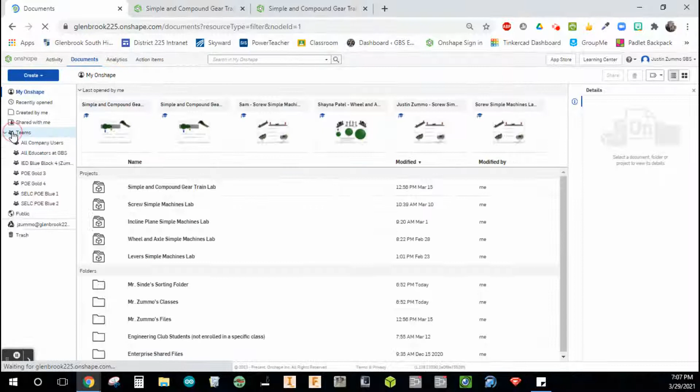The first step, as always, is to sign in to the Glenbrook Enterprise. Once you've done that, flip over to the Documents tab, locate your team folder for your class, and find the new project folder titled Simple and Compound Gear Train Lab. Open that up. Select the file, right-click, go to Copy Workspace, remove 'Copy' at the end of that title, and add your first and last name at the beginning.

As that's taking a moment to populate, I wanted to flip over to the second tab I have open here and show you the completed version of this lab.

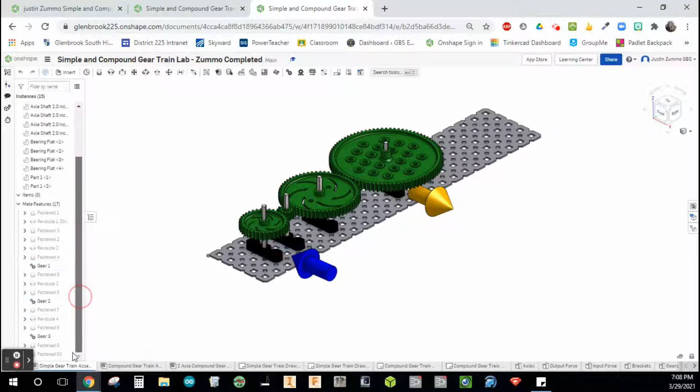So this is what we're going for with the simple gear train. We're going to have 4 different axle shafts. Each gear is on its own shaft, and you're going to link up the 36 tooth to the 12, from the 12 to the 60, and then from the 60 tooth to the 84 tooth. We'll do some gear analysis relations, so there are specific values that we'll type in to make it all animate and look nice.

When it's all said and done, you'll be able to animate the revolute constraint. I'll set this to loop. If I hit play, you can see each one of those gears individually rotating, and the gear relation values we type in specifically allow this animation to look as good as it is. They all rotate at the same speed, or the appropriate speed, I should say. So that's just a quick look at the simple gear train.

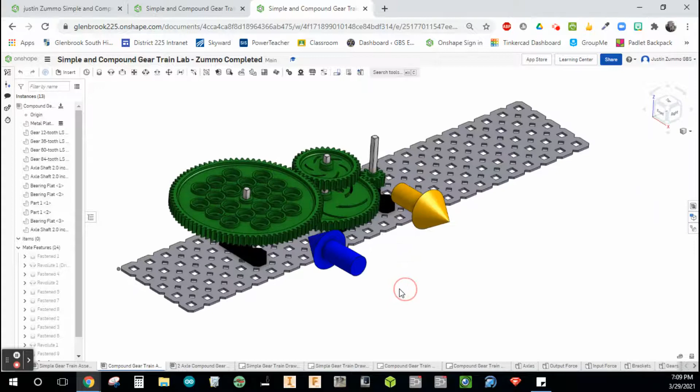The compound gear train will have 3 axle shafts. Starting on the first axle shaft, we're going to hook up the 84 tooth gear to the 36 tooth gear. That one will then share a shaft with the 60 tooth gear right underneath there, and then we'll make a connection from the 60 tooth to the 12 tooth gear to round it out.

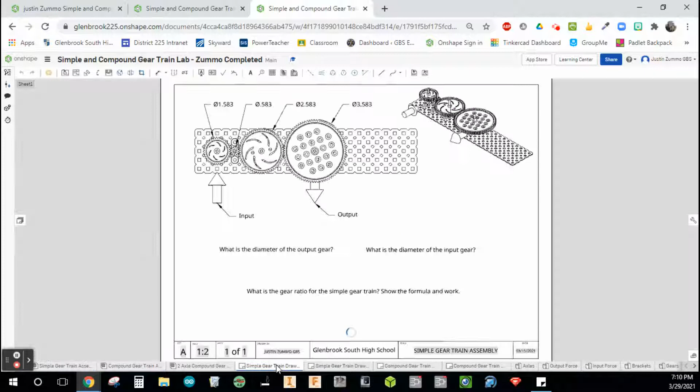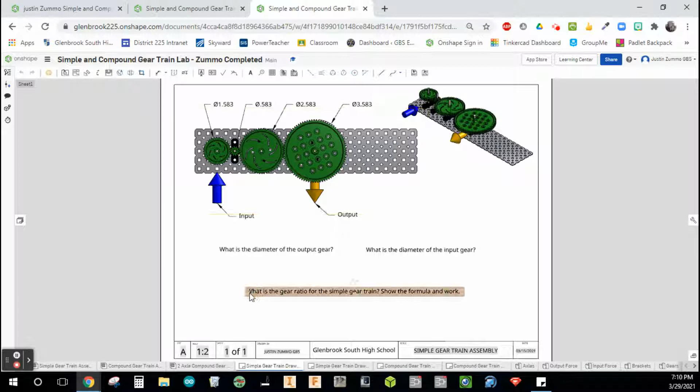There are 2 drawing sheets for this activity. The first one is for the simple gear train. I dimensioned the diameter for each one of these gears. So using the diameter, tell me what's the diameter for the output gear, what's the diameter for the input gear, and then using those diameters, what is the gear ratio for the simple gear train? Make sure you show the formula and all your work using the note feature right here.

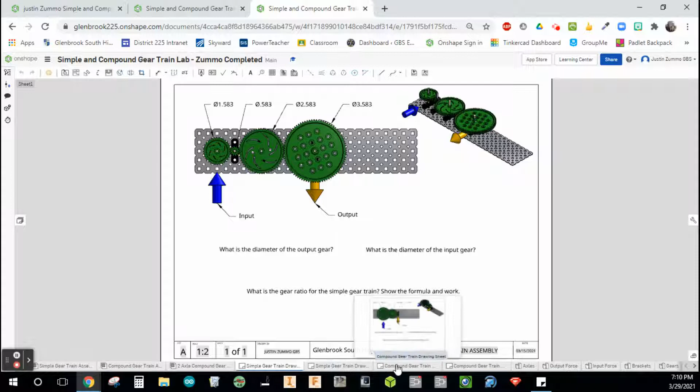On the second drawing sheet, you'll see the compound gear train. This time around, I decided to give you the information relating to the number of teeth. So using the number of teeth, tell me what does the final output gear have in terms of teeth? What does the initial input gear have? But make sure that you take into account that this is a compound gear train, and we can't just go from first to last with this. So you will have to set up the formula and calculate what is the gear ratio for that compound gear train.

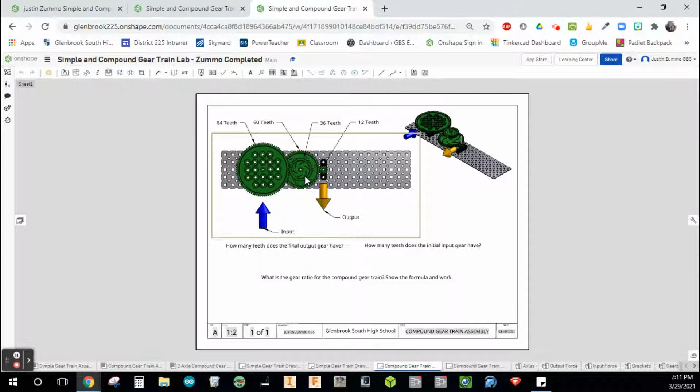As a reminder, you still do your out over in for the gears that are meshed together. And then when you have them on a single shaft, you want to multiply those 2 ratios together to get a total ratio for the entire gear train in itself.

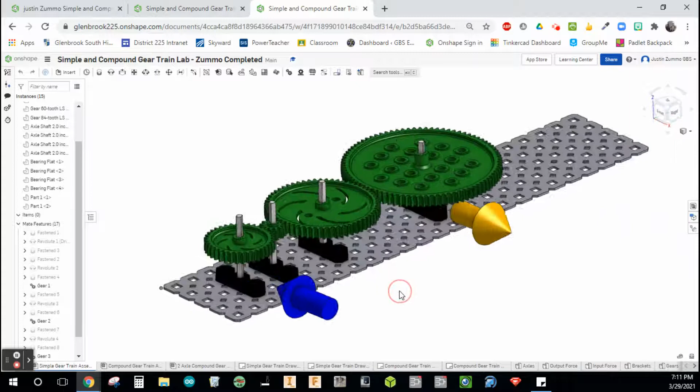So I'm going to leave this tab open in case I need to come back and reference any of these dimensions. Pretty straightforward though. We're just going to set one of the bearing flats in there, and based on the spacing here, set up our gears on the axle shafts and then get them to rotate nicely together. Just going to be a little bit of offsetting with the heights for the gears so that they're in line with each other.

And that's pretty much it. So let's go ahead and get started. Flip back over to this tab. Okay, and it loaded me onto the axles tab, but you guys should know at this point now, go ahead and move all the way down to the left and find the simple gear train assembly file.

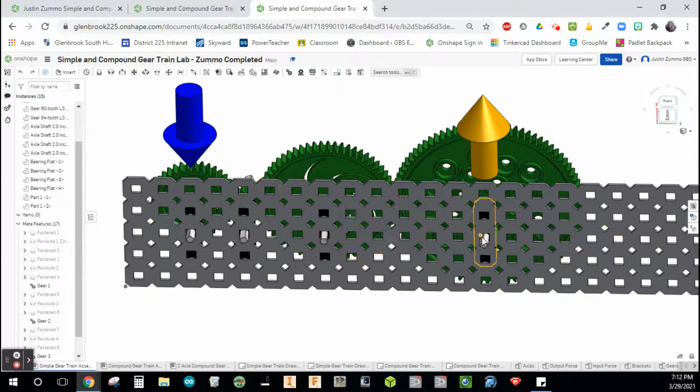And I'll go ahead and set my bearing flats in place first. Going back and forth here between my completed version and the one that I'm demoing for you, I'm going to skip 2 holes and put my first one, skip another hole and put my second one, skip 2 more, put the third, and then skip 5 and put the fourth. So let's go ahead and do that.

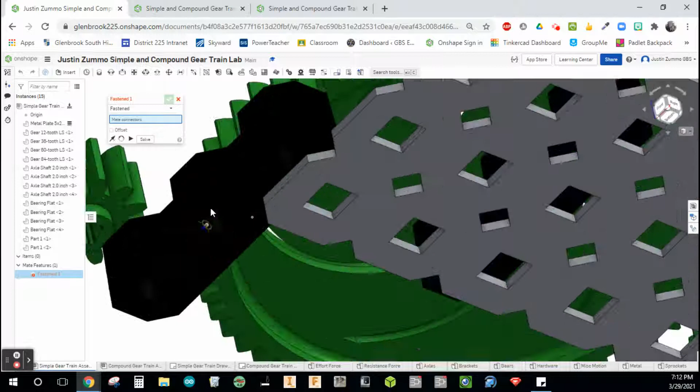I'm going to grab my fastened mate constraint, rotate to the bottom half of the bearing flat, get my edges to pop up, and go ahead and select the center hole. It really doesn't matter where you start here, I'm just going to start exactly where I had it on my completed version.

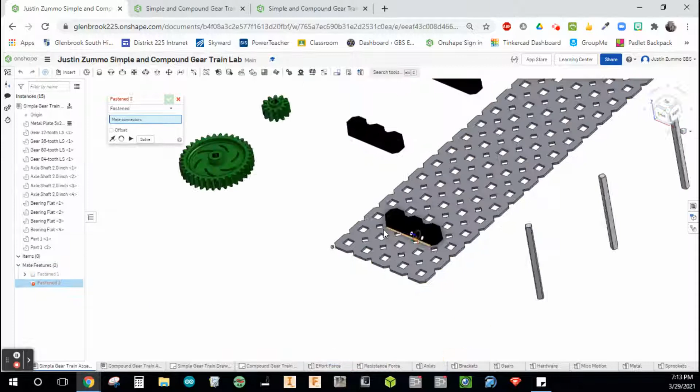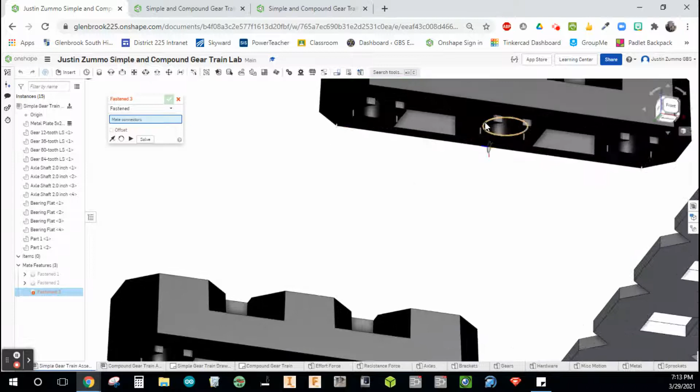So in the center of the plate, right on top of it, check mark to finish the placement. Do the next one, get the center bottom of that hole. We're going to skip one row and put it right there. We'll then skip two more and put our third one. Grab that point right underneath in the center, skip two rows, here comes our third bearing flat.

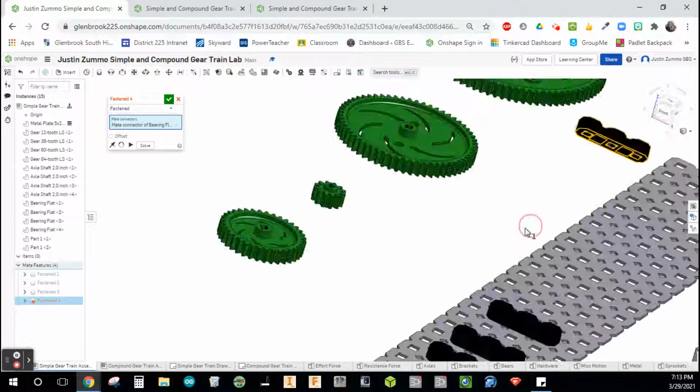And lastly, number 4, grab the center point on the bottom. We're going to skip 5 rows, 1, 2, 3, 4, 5. I'm going to put it right here on the 6th one. Double check that.

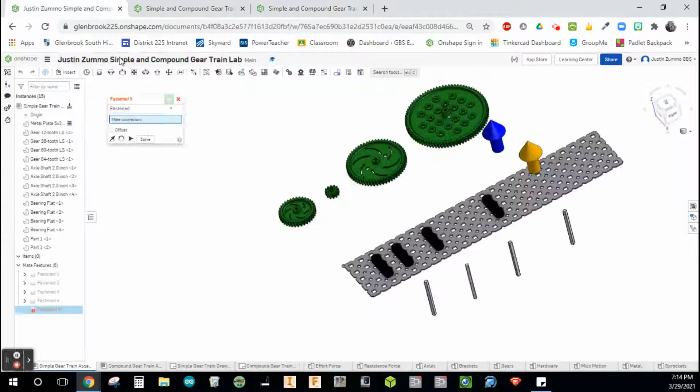Looking good. Okay, so next I can go ahead and drop my axle shaft in, and I do want this to be a revolute mate. So I'll grab the revolute mate here, rotate to the bottom, and go ahead and grab this bottom point on the center of the shaft.

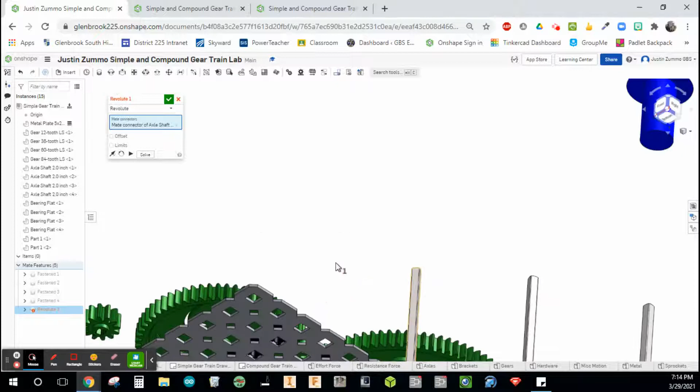And then from underneath the plate, actually, I'll just go ahead and find that hole that I have my center point lined up on, and I'm just going to grab the very bottom of that plate. No offsets required. I did have an offset on my completed version, but it's not really necessary. So go ahead and continue that process.

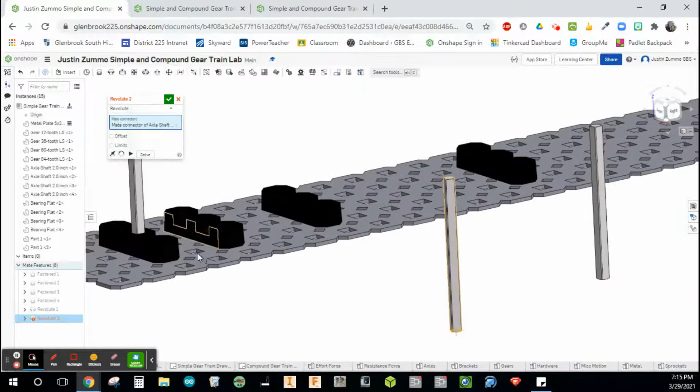Grab the center point on the bottom of the shaft, grab the center point on the bottom of the metal plate. I'll just do it backwards this time, grab the center point on the plate and then on the axle shaft.

And the last one, bottom center there, bottom center here. Okay, check mark to finish that placement. We now have revolute constraints for each one of the axle shafts.

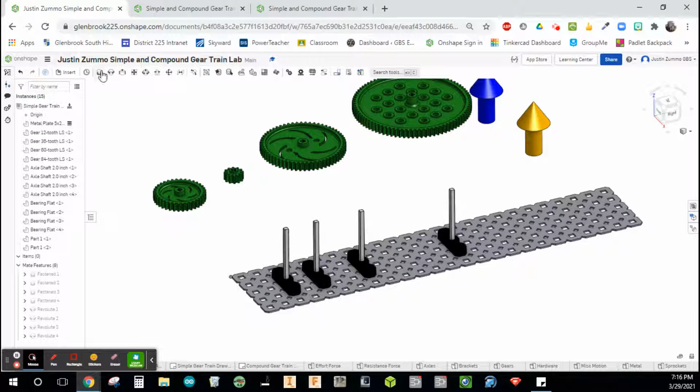And the next step will be to go ahead and seat the gears onto each one of the shafts. We'll just have to do some offsetting so that the gears are nicely in line with each other. So we'll go ahead and start us off with a fastened mate. I'm going to grab the center top right here, grab the center top there, and I'm going to offset it in the Z direction, negative 0.5.

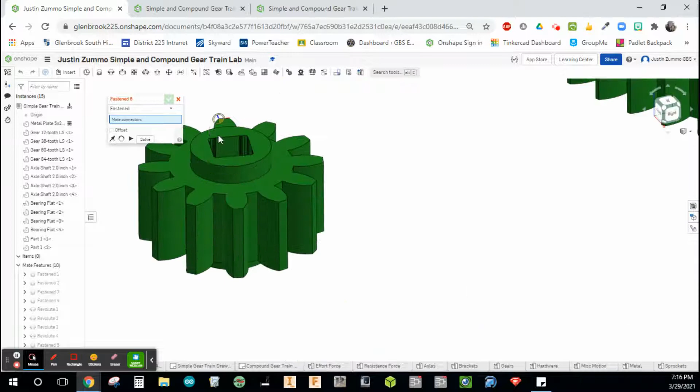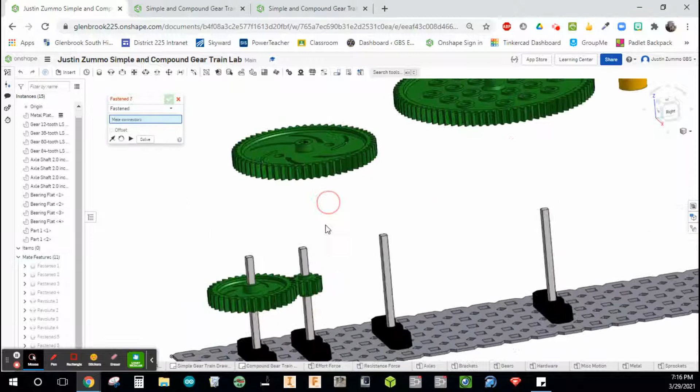Moving on to the 12-tooth gear, grab that top center point, grab that top center point, offset Z negative 0.5. That looks perfect. Check mark. Next, the 60-tooth gear, grab the center point on the gear, center point on the top of the axle shaft, do an offset in the Z direction of negative 0.5.

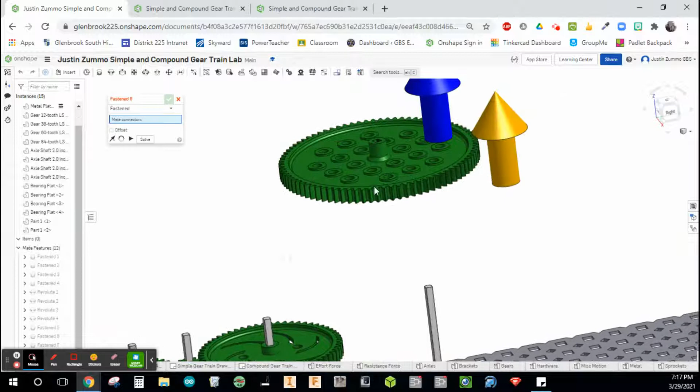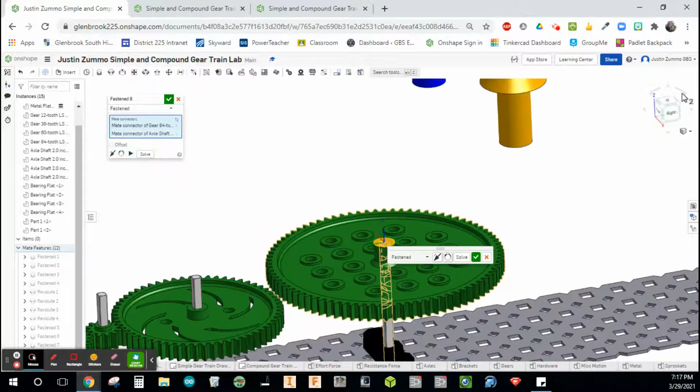Those are all perfect. And I believe the last one's going to be a little different just because of the extension that's on this gear. It's extended on one side and it's flat on the other. Either way, we'll have to do a different value for offset because these have a smaller offset around the axle shaft. So we'll go ahead and grab the top center point on this one, grab it here on the axle shaft. I'm just going to click on the right side of my view cube so I can see it from the right profile.

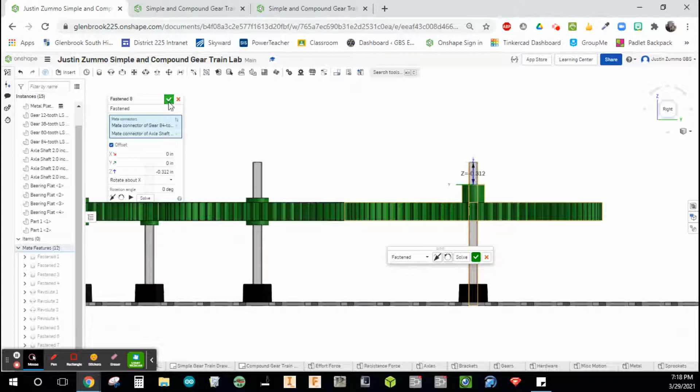That way I can play with this number for a moment. If we do negative 0.5, it ends up a little low, so we can bring that up to negative 0.3, which for all intents and purposes would be just fine. I'm going to add a little bit to that, negative 0.3125, and it looks pretty nicely in line right now. Hit the check mark to finish the placement there.

And if you notice, you click on your gears, you can actually rotate them, but they're all glitching through each other. So the next step is going to be to set up that gear relation between each one of these gears. So the first one is going to be gear relation.

And for mates, you can actually select—it might be a little easier just to grab it off the feature list here because you need to select certain mates. So I'm going to say between Revolute 1 and Revolute number 2, I want that relation ratio to be 3 because it's 36 out.

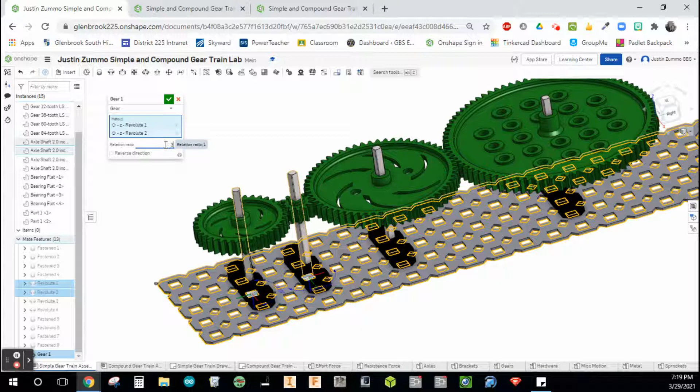I want that relation ratio to be 3, which is kind of counterintuitive to the formula that we use. We normally think about gear ratios as out over in, but for some reason when you're doing the relations here in Onshape, it's actually the inverse of that. So instead of doing 12 divided by 36 to get 3, I'm going to flip those numbers and say 36 divided by 12, which gives me the relation ratio of 3. Right? Now that should be pretty good in terms of rotation. They'll rotate in unison with each other.

So you might notice that I do have a little bit of an overlap here between the gears, and the kind of cheap and dirty way to fix that is to slightly offset the rotation for the gear and the axle shaft. So if I go to my fasten mate number 5, I can hit the drop down menu here and say rotate around the Z axis. And if I just put a really small number in, and I'm going to click inside the box here just to see how far it moves, still a little bit of glitch with 1 degree. Try like 1.5 degrees. Still a little bit of glitch. Let's see how 2 looks. A little far on the other side. So 1.75. And you can really play with that as much as you need to in order to create the outcome that you desire.

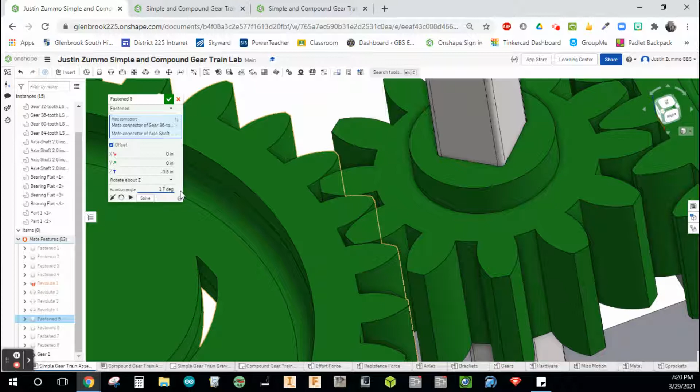It's a little bit touching there still, so me being a perfectionist at times, I want to keep playing with that number and see where I can get it to line up nicely. Is it 1.65? That looks just about right. I could have just referenced the value on my completed version because I did take the time to go through and make those changes. But here, a rotation angle of 1.65 degrees allows those teeth to kind of line up nicely.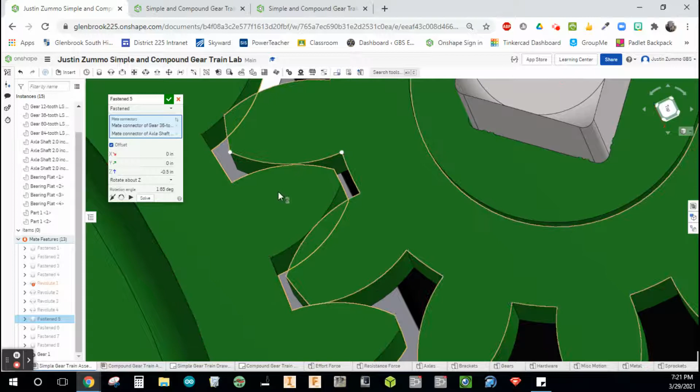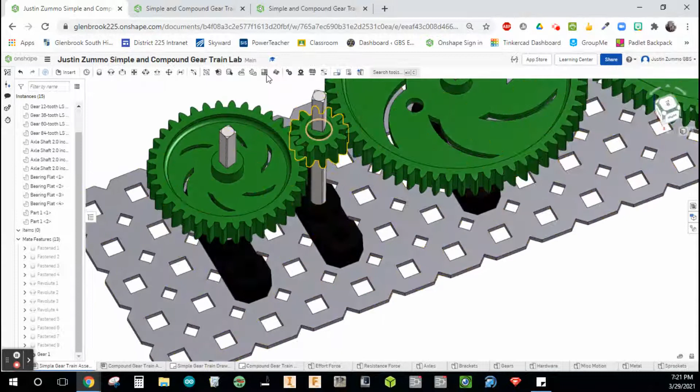I called it cheap and dirty because technically now, if you look here, we've actually rotated the shaft away from the center point, or like in alignment with the opening for the gear. So you do have a little bit of a glitch here, but it's such a small number that you're really not going to see it. And it's a fine trade-off when you see those gears meshed perfectly and rotating perfectly with each other. So that would be my suggestion for you all as you're making your progress through this lab.

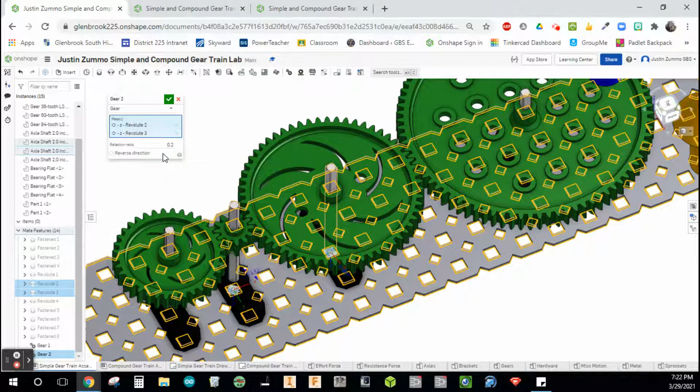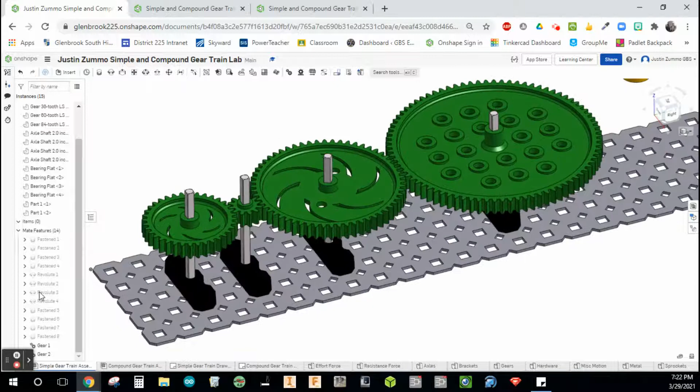Next gear relation, we're going from the 12 tooth to the 60 tooth. So I'm going to grab Revolute 2 to Revolute 3. My special number for this is 0.2. Hit the check mark to finish the gear relation. If I try to move this, getting a little glitchy just because of the lag here, but I'm going to go ahead and just animate it this way. Put it on a loop, 300 steps for 360 degrees. Play that. Always looks a lot nicer when you do it this way.

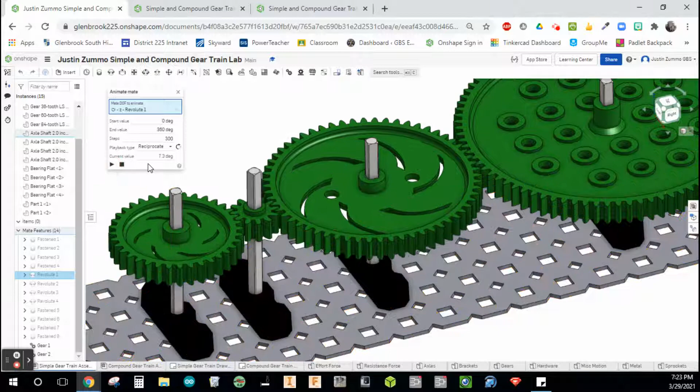So something that I'm noticing right now is my gear is actually rotating in the wrong direction. And you can change that by going to the gear relation and just checking the box there for reverse direction. So go ahead and do that now. Double click gear 2 relation, hit the reverse direction option. Go back to Revolute 1 and animate it. See how that looks. That's better. Now the gears are rotating in the proper direction. Just might want to do another little offset here on the third gear to get those teeth to line up a little better. So let's go ahead and try that.

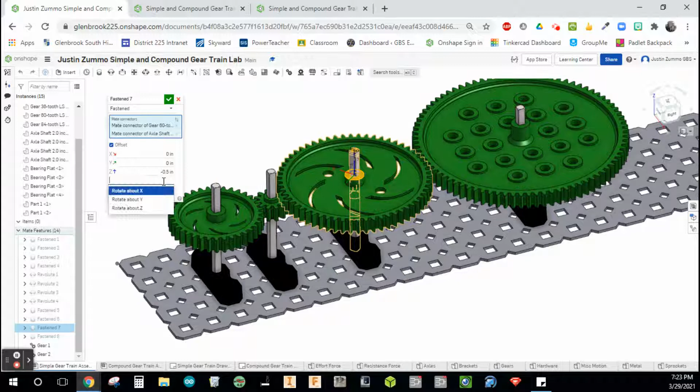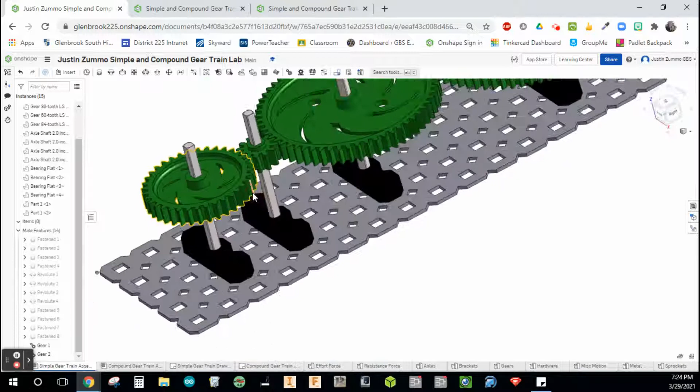Fastened mate number 7 is the one that I want to change. Rotate around the Z-axis is the direction we want to rotate in. If I just switch to the top-down view here, let's play with those numbers and see where we land. 1 degree looks perfect to me. There's a perfect amount of separation on each side there. So I'm going to go ahead and check mark that. And then run it one more time through the animate feature just to see how it all looks. Perfect. Very satisfying to see those gears turning in unison without any glitching between them. All right, we got one more to go.

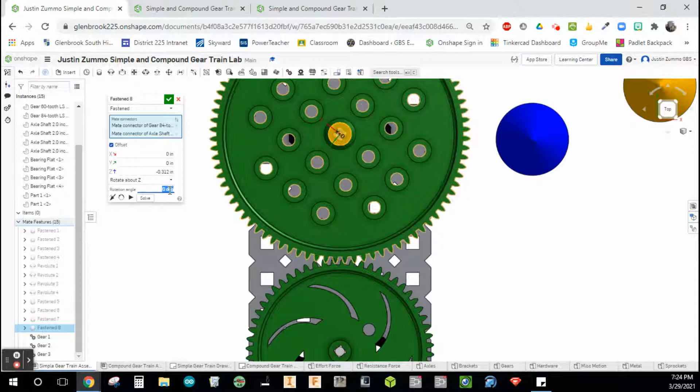Do a gear relation between Revolute 3 and Revolute 4. My special number for this one is 0.714. Check mark. And then we can do a little offset here on our last constraint to get those teeth to line up nicely. So Fastened 8 is the one that I want to mess with. Rotate around the Z. Let's try 1 degree and see where that puts us. I doubt it will work as nicely as it did last time.

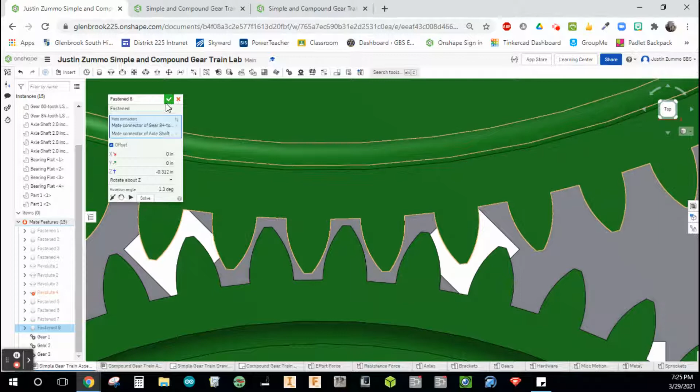Okay, so 1, let's try 2. 2 is too far, split the difference, 1.5. A little much, 1.4. About 1.3. That looks perfect. Check mark. Finish it. Let's animate it and check the directions. Animate. Play it.

And so in fact, my last one also needs to be reversed. It's rotating in the wrong direction. So on gear 3, reverse direction. There we go. Play it again, just to make sure. And there you have it. All 4 gears rotating in perfect unison with each other.

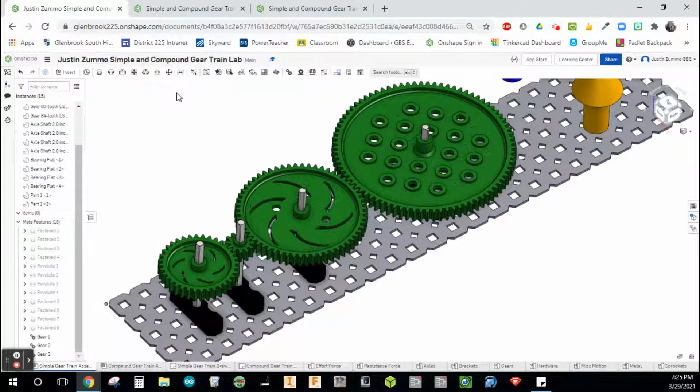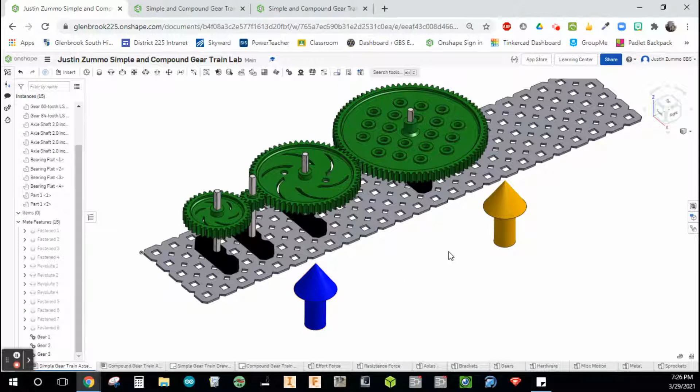The last 2 bits that we want to add here are going to be our gear ratio input and output indicators. Before we used red and green with our Simple Machine Labs to indicate forces. In this lab, I switched the colors purposely to go from blue to orange to signify input for the gear and output for the gear.

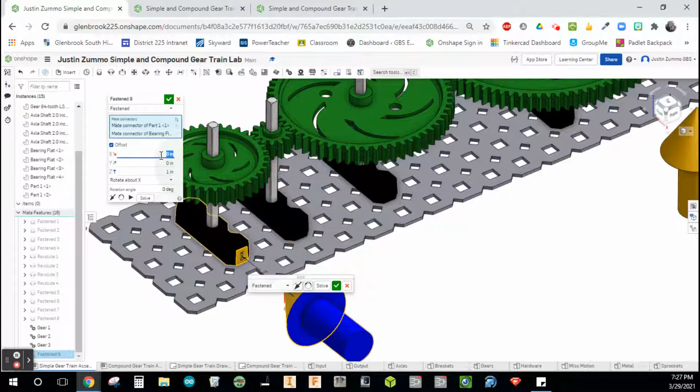To constrain our input and output arrows, I will grab the tip right here, and off the side of the bearing flat, there's a nice center point we can click on. I'm just going to flip it and then offset it a little bit so it's not hanging out on the bottom, glitching through the metal plate. So we'll do Z 1 inch, bring it back, and in the X direction, I can go up 1 inch, -1, just to bring it out and set it out in front there.

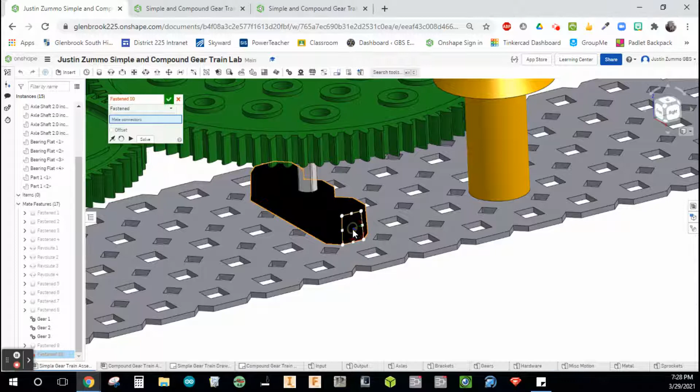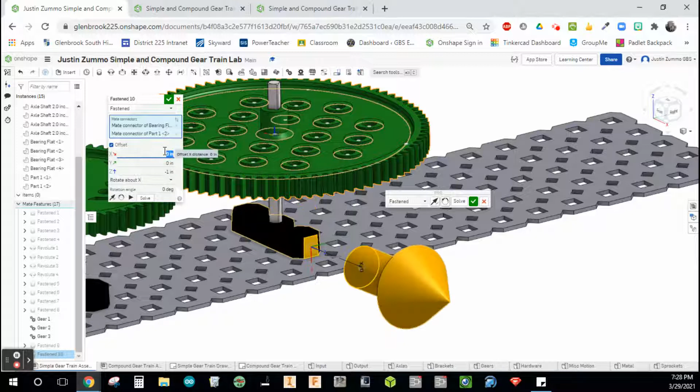All right, and then for output, grab that same point right there on the bearing flat, and I'm just going to grab the bottom of the cylinder on my output arrow and do a little offsetting. 1 inch for the Z. Looks like it wants to be negative, positive. There we go. Actually, it's glitching through the gear just a smidge, so I'm going to go -1.5. Just to push it out in front. And there you have it, the finished simple gear train assembly.

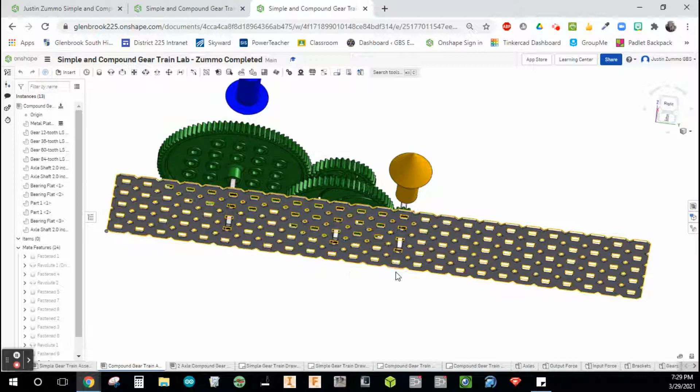Okay, so now I want you to take those same principles that I just walked you through, setting up the shafts, the bearing flats, and all that, and we're going to make our own compound gear train assembly. So let me reference my finished version. Compound gear train assembly, just for the spacing. I'm going to start off on the 6th hole and then skip 4 between the next axle shaft and then skip 2 between the 3rd axle shaft. So 5, 4, and 2. Let's go ahead and set those up.

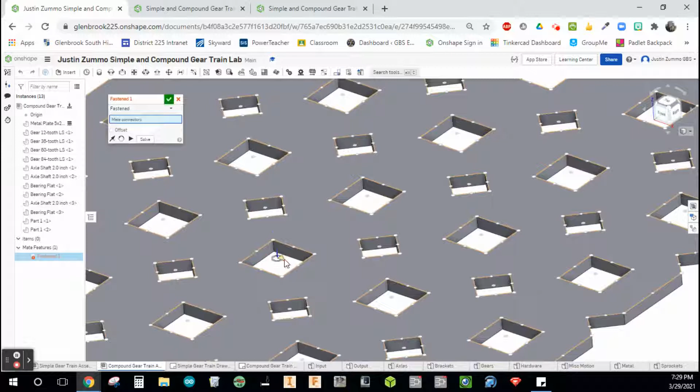Fastened mate, top of the plate, 1, 2, 3, 4, 5. I'll go for the 6th one here. Grab that point. Bottom of the bearing flat. Grab the point on the cylinder hole. Check mark to finish. We're going to skip 4 spaces here.

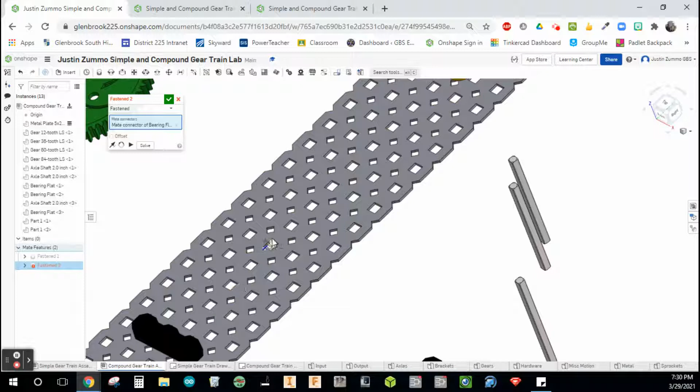For the next bearing flat, grab that point. Skip 1, 2, 3, 4. Place. And then skip 2. Right there, grab that point. And then grab the bottom of the bearing flat. There we go. Okay, we got that in position now.

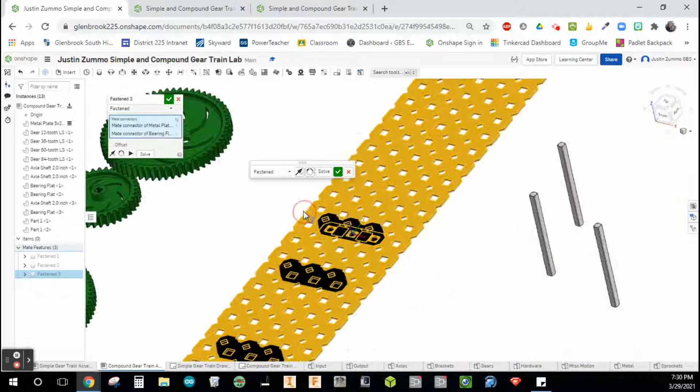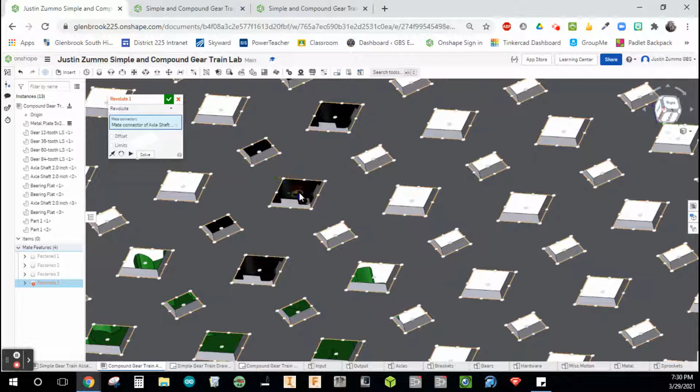And just like we did on the simple gear train, we'll get the axle shafts set in there using revolute constraints. Revolute. We'll grab the bottom of one of my shafts. And then the bottom of the metal plate down here underneath where the bearing flat is. Check mark. Finish that placement. We'll do another one, revolute.

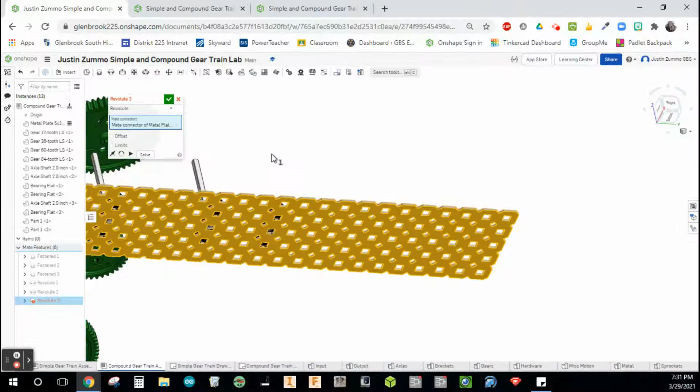Grab that point on the metal plate. Grab the bottom on the axle shaft. Check mark to place it. Third revolute. Grab the point on the metal plate and then the point on the shaft. Okay, so at this point, we have all 3 shafts put in place.

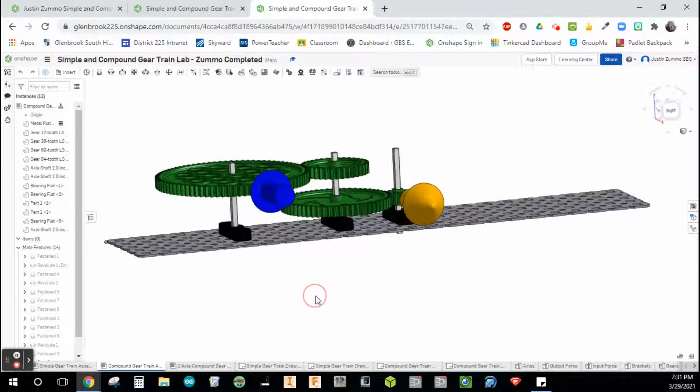And now we're going to set the 84 tooth gear onto the first axle shaft. And again, we'll just have to play the game of offsetting that with the height to get the gears to line up and mesh well with each other. So I'm going to drop the 84 tooth in there with a fastened mate.

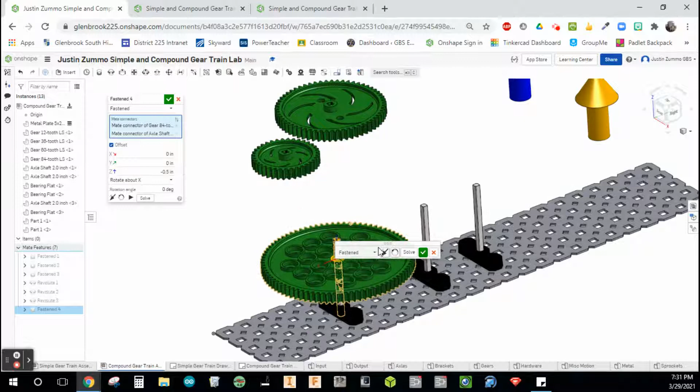And then I will offset that in the Z direction, negative 0.5. I might have to come back and change that number. I forget what my special numbers were that worked out well for alignment. On the next one, we're going to put the 60 tooth gear on the bottom and then the 36 tooth gear on top.

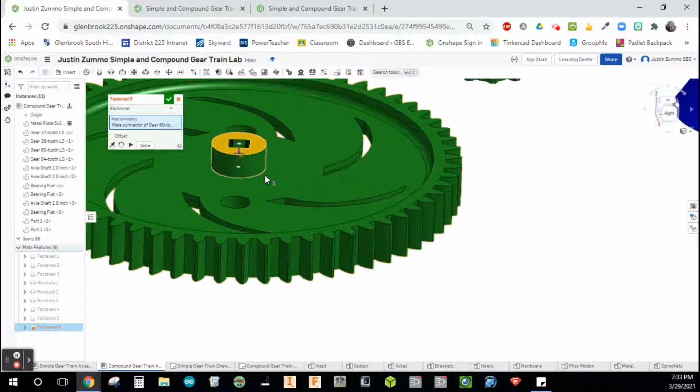Just going to double click number 4 here and change that to 1/4. And then we'll go ahead and grab the 36er, set that on the second axle shaft, offset it. I'm going to go with negative 0.175. Then I'll grab my 60 tooth. We're going to put this one on. Offset, -1. Bring that down. There we go, looks good.

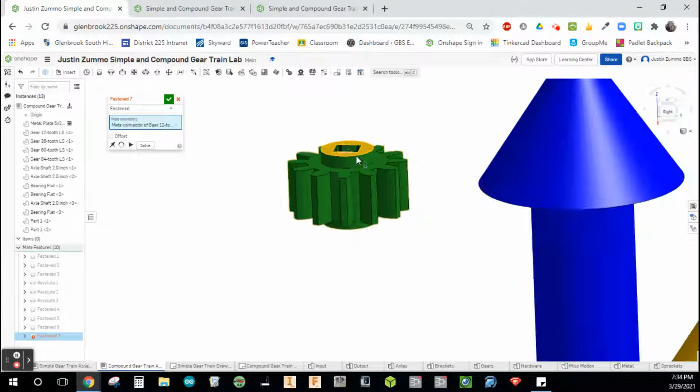And then the last one, our 12 tooth, fastened mate. Grab the center point. Grab the center point on the axle. Offset in the Z direction, -1. Perfect.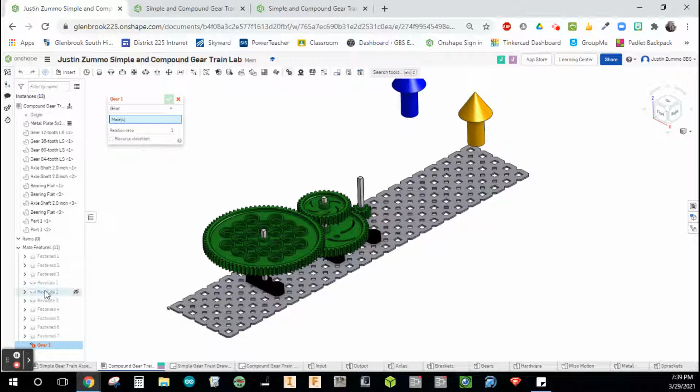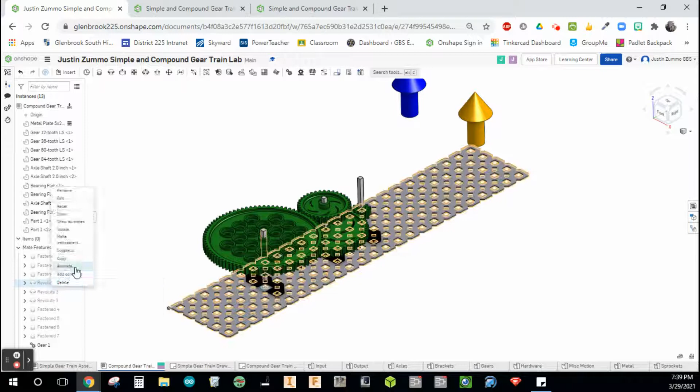So at this point, what we want to do is add the gear relations. So I'm going to get started by selecting Revolute 2 and then Revolute 1. And my ratio for this is going to be 0.429. The check mark for reverse direction. Let's go ahead and check that. Run the animation through Revolute 1. That is now rotating in the correct direction at the correct pace. We'll just do a little offset there to make the gears look better and have them mesh better.

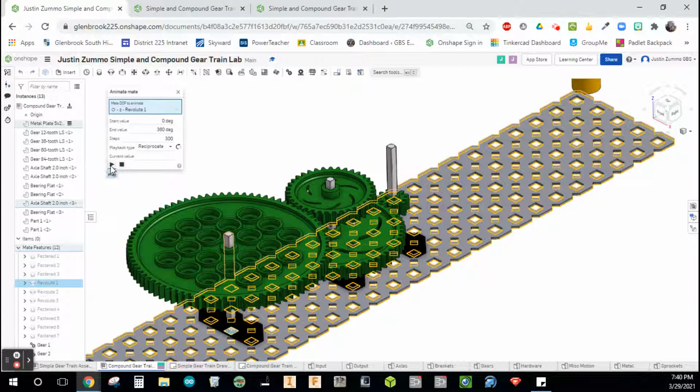The second gear relation that we want to set up is going to be from Revolute 3 to Revolute 2. And my relation ratio should be 0.2. Check mark. Let's go ahead and animate that. Perfect. So you can see with this transition that we've created of big gear to small gear and then big gear to small gear again, we've increased the speed output of our gear train.

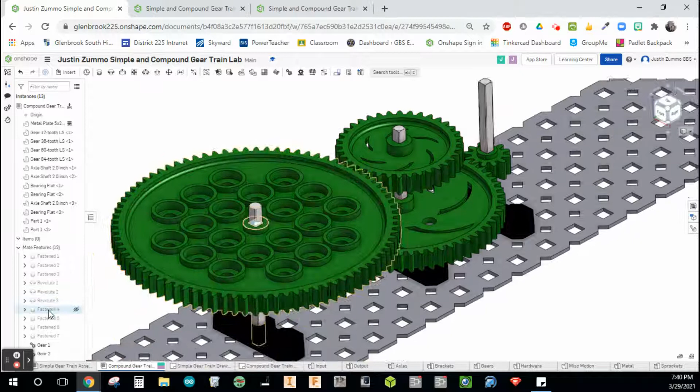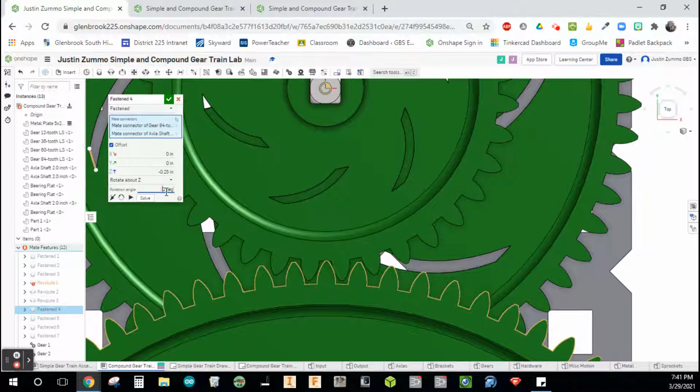So let's go ahead and clean this up a little bit. We just want to do some offsetting. So I'm going to open up fasten mate number 4 and rotate around the Z axis. I'll hit the top view on my view cube so I can zoom in and see it from here. Let's do 1.5, a little much. 1.4, ooh, going the wrong way. 1 degree, 2 degrees, let's see, 2.1. Zoom in, 2.1 looks perfect.

And again, you can kind of see here how those two profiles aren't really matching up now. So that's how we're cheating it a little bit here, virtually speaking, to get the teeth to match up nicely. And then I'll just do that again on my 3rd gear. So on fastened mate number 7, view it from the top down. We'll zoom in, rotate around the Z axis. Let's try 1 degree.

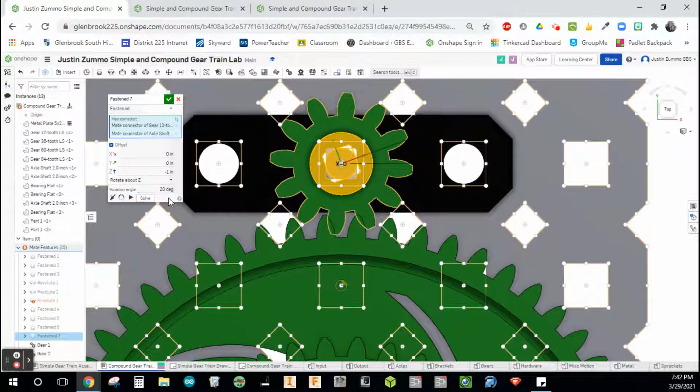20 degrees. That's a big one. That's a lot of rotation. I think I could do better if I just go negative. Let's see here. If I go -5, that actually drops it in the exact same location, and then my shaft's not completely twisted out of control. That's fine. I'm going to go with -5 there. Hit the check mark.

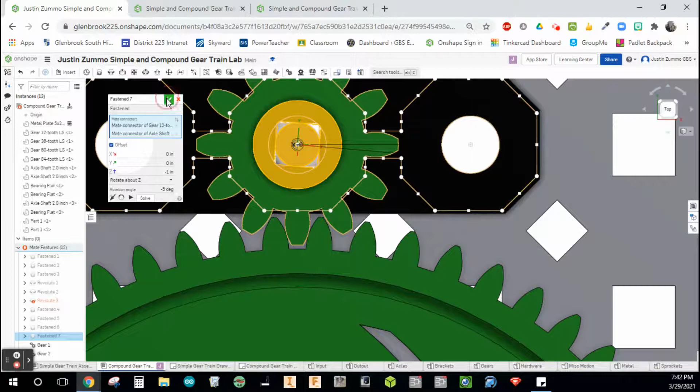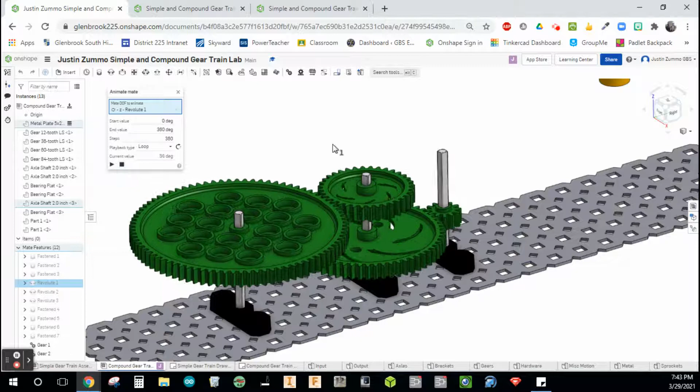View it one more time to appreciate all the hard work we just put in on this one. Right click, animate it on Revolute 1. Want to loop it. 360 steps. Play. There we go. Again, very satisfying to watch those gears rotate in unison, especially this guy at the end here.

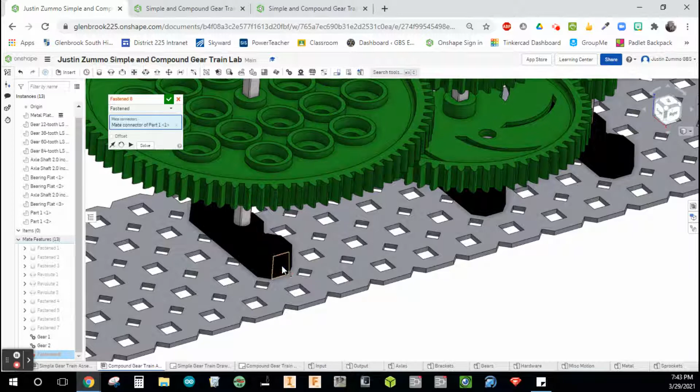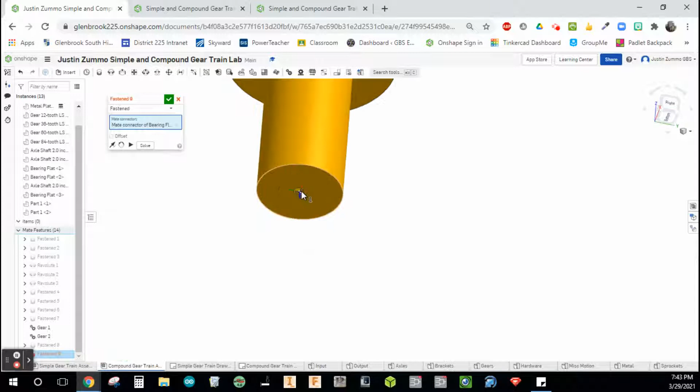Last 2 things on the assembly are to attach our input and output arrows. So I'm going to grab input here, just like we did on the simple gear train. Flip it, offset it, 1 inch back, -1 inch going up. That'll do. And then for output, grab the side of the bearing flat, grab the bottom part of the arrow, and we'll just do a little offset here. -1 and +1. There we go. Okay. Input and output indicators are in place.

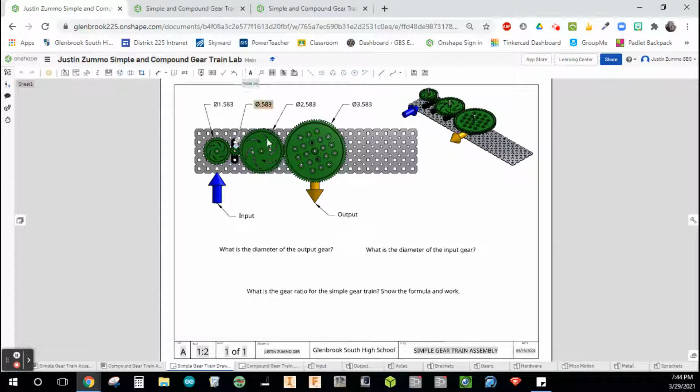At this time, we can go ahead and switch it over to the drawing sheets. And as I explained at the beginning of the video, you'll answer these questions accordingly. For the simple gear train, use diameters. Please make sure you're using the note feature to actually type out your work. And on the compound gear train tab, you will use number of teeth to do these calculations down below. Again, use the note feature, type it out here on the sheet.